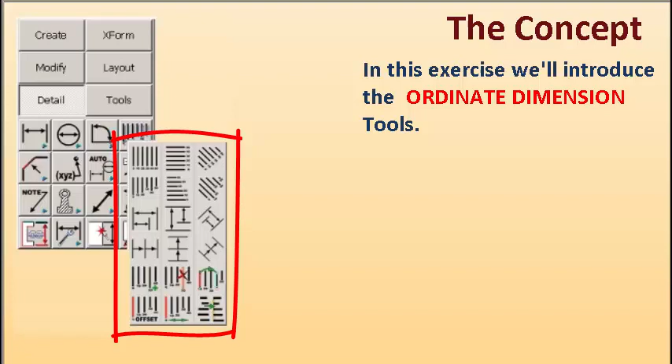In this exercise, we'll introduce the ordinate dimension tools. The top portion of the palette contains Create tools, and the bottom portion contains Modify tools.

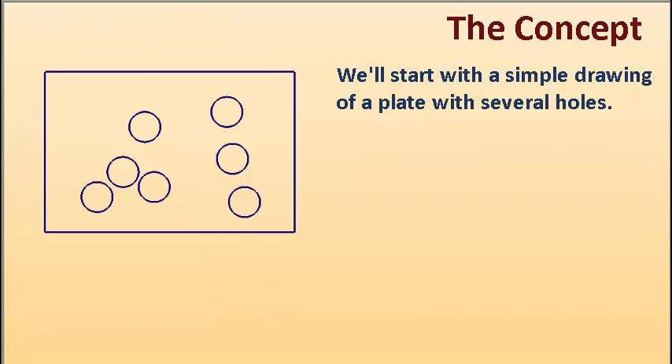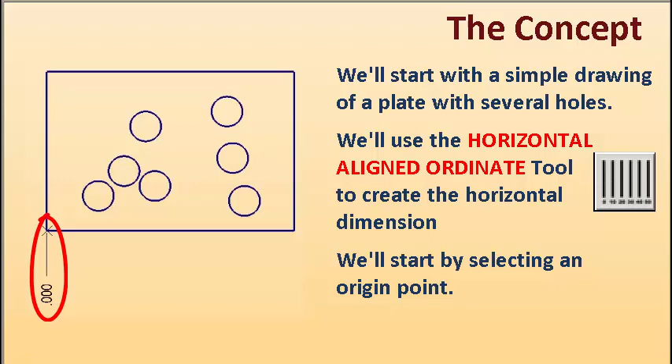We'll start with a simple drawing of a plate with several holes. We'll use the horizontal aligned ordinate tool to create the horizontal dimension, starting by selecting an origin point, then selecting each circle center. Our finished ordinate dimension will look like this.

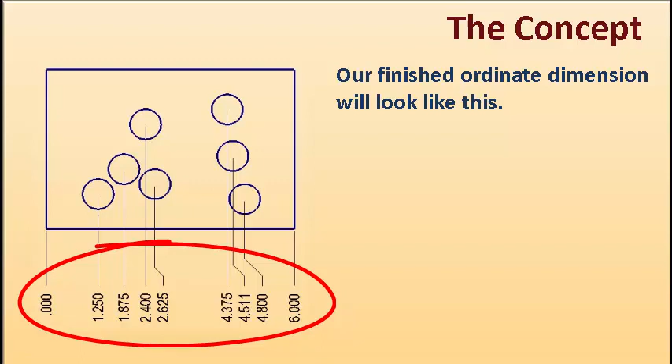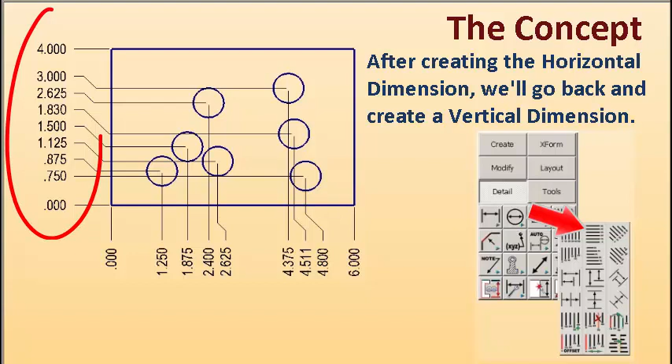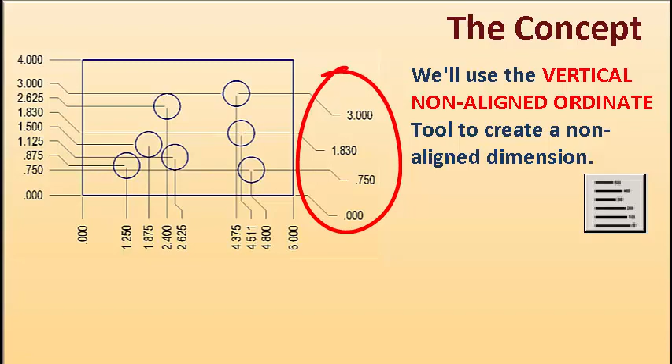We could have also used the horizontal non-aligned ordinate dimension tool to dimension the circle positions. After creating the horizontal dimension, we'll go back and create a vertical dimension, then use the vertical non-aligned ordinate tool to create a non-aligned dimension. We'll note that we could also create ordinate dimensions along an oblique axis.

So let's work with an actual file. We'll open up sample file KCV drawing6.ckd.

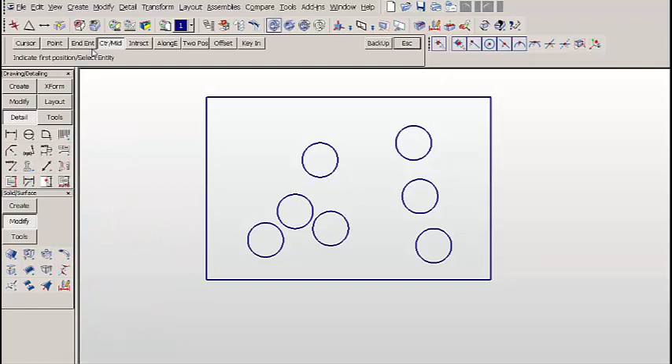Let's click on the horizontal ordinate aligned tool. We'll start by indicating the origin for the dimension, using an end-of-entity pick on this corner. Then using center mid, we'll click on each of the circle centers.

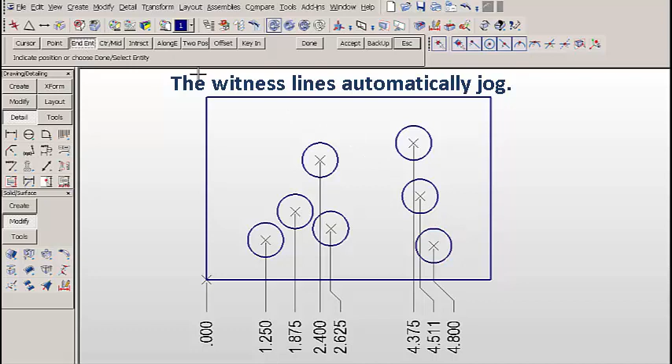You can also use the position snap menu. I'm doing this specifically with the universal menu so you see what I'm doing. Notice that the witness lines automatically jog.

Now let's pick the vertical ordinate aligned dimension. We'll pick the same origin, and then select each of the circle centers again. Notice again the automatic jogging as we place dimensions.

We'll go back and pick up that top left corner. And it's literally that simple.

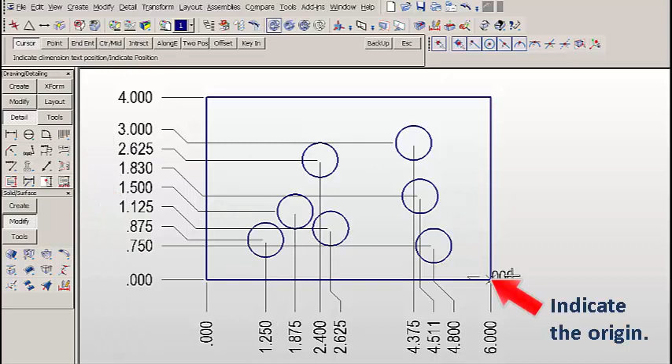Let's pick the vertical ordinate non-aligned dimension and just throw a few on this right side here, so you can see that you can pull every single dimension, including the origin, and jog it to wherever you want. Sometimes on a busy print you might want to use this.

And that's all there is to it. It's relatively simple and easy to use.

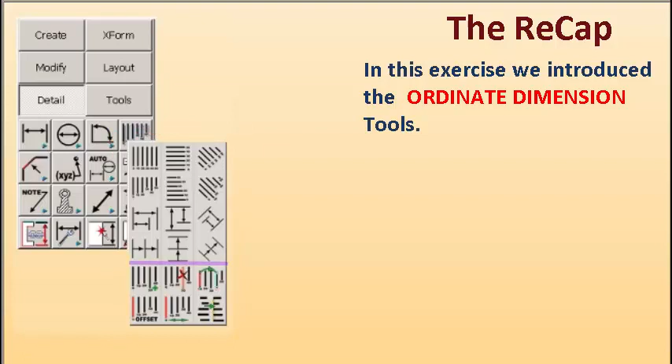So let's recap. In this exercise, we introduced the ordinate dimension tools. The top portion of the palette contains Create tools, and the bottom portion contains Modify tools.

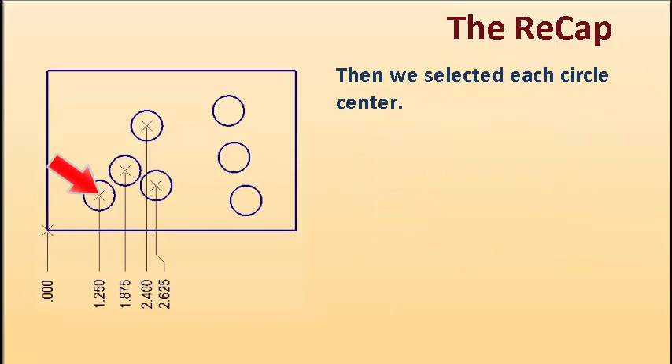We started with a simple drawing of a plate with several holes. We used the horizontal aligned ordinate tool to create the horizontal dimension. We started by selecting an origin point, and then we selected each circle center. Our finished ordinate dimension looked like this.

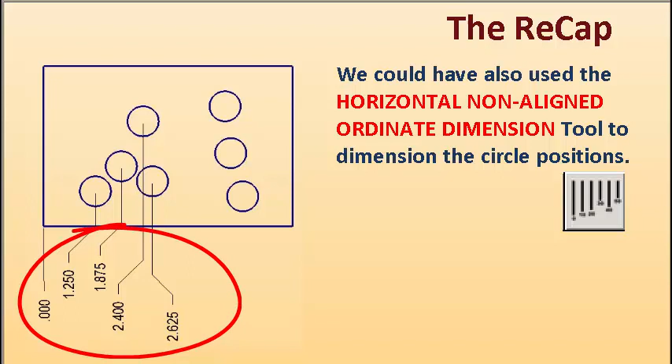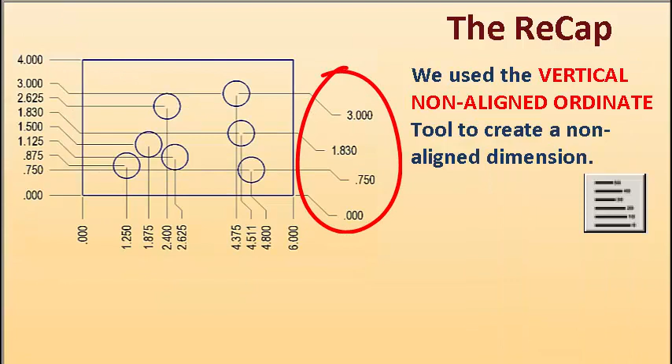We could have also used the horizontal non-aligned ordinate dimension tool to dimension the circle positions. After creating the horizontal dimension, we created a vertical dimension. We used the vertical non-aligned ordinate tool to create a non-aligned dimension on the right side. We noted that we could also create ordinate dimensions along an oblique axis.